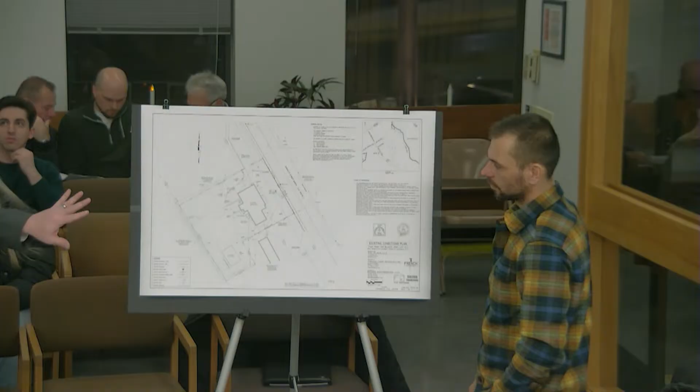All right, any questions from anybody? Do we have a map of what they're doing? Do you have a map? We do. Mario, would you please? I was gonna ask you about that, so we can put that on the screen too, for all those at home that are waiting to see this. So maybe you can show us the difference. Sure. This is the existing conditions plan. This is what you saw initially. You see the conditions of the site right now. You see where it's located. It's stamped appropriately, et cetera.

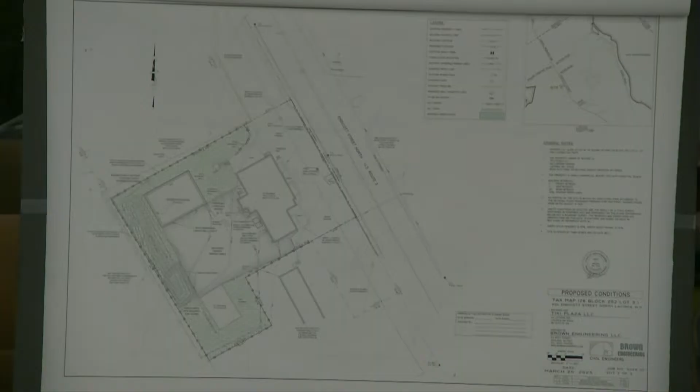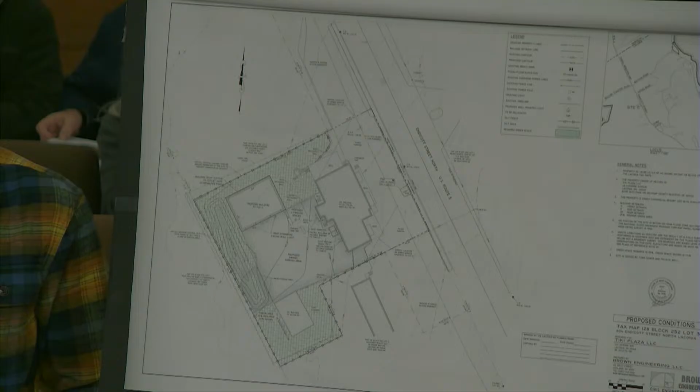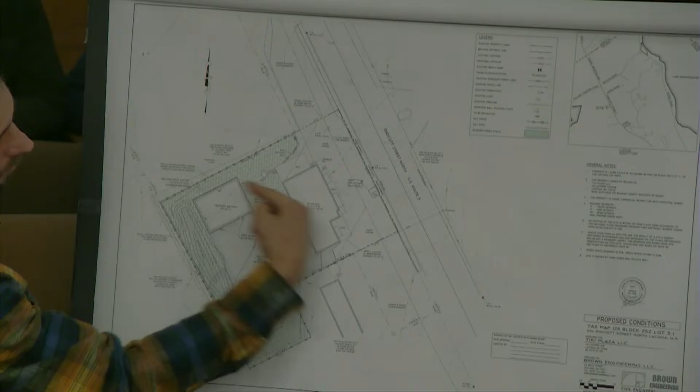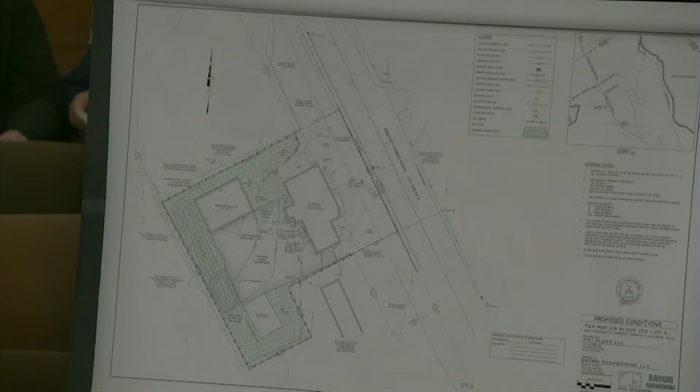And if the pond was to overflow for whatever reason, catastrophe or something like that, where's that water go from the pond? So ultimately, it would be challenging for that pond to overflow. But, sure, describe this, that would be great. I think first, this is what we went over in the first meeting, but it's important to know what the water is doing before any of this happens. The site is sloping down in this direction from the roadway, all the way from Fun Spot. It comes out, comes across, there's a long building here, hits the front of the building, comes around this building, and it all flows down to this lot down here, which is map 128, block 252, lot 1. The stormwater pond does not route this water to anywhere it wasn't going before. Its only duty is to prevent any higher flows or volumes from going downstream. So if it were to overflow, it would flow where it is flowing today.

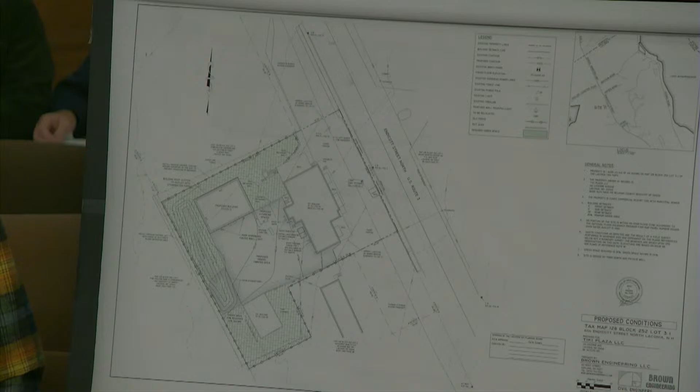So the pond doesn't have high sides or anything, it's level with the ground, correct? Yeah, it's dug down. So it's not like a dam or something like that. No, see the profile of it, and you can see the existing ground line is here. Again, this is all going downhill, but this cut line is in the middle of the pond. So nearly the entire pond is in a cut condition. So there's really no buildup. It's more of a depression.

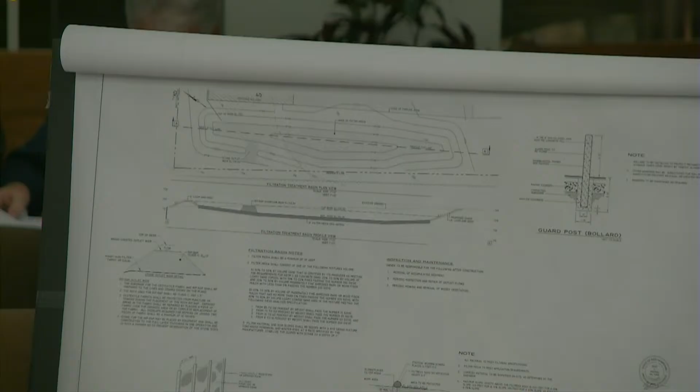Mike? I remember we approved this building, the campground, right, and the abutters sued because they weren't happy with it. The building's not that big to make that much watershed. What's the square footage of that building? 2,700 square feet. But that's not what we're discussing now. We're discussing the amendments and to see if we approve of those, because everything else has already been discussed. Correct. Okay. The only difference is the pond is bigger, the rain gutters are putting everything into the pond, and the additional green space will hopefully soak up more of this water. Correct.

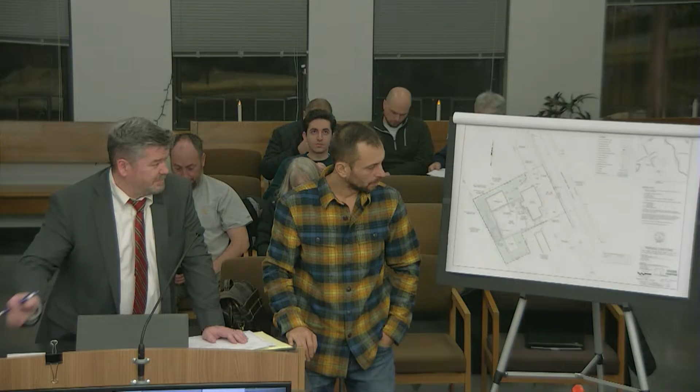Chair, when was the original approval? When was it? Back in December, I believe. No, no, May 3rd, 2023. Okay, years ago. Right, May 3rd, 2023. I thought it was further back than that, before my time. I don't remember talking about this before. Well, litigation takes some time. We worked through it back in December, not a month ago, a year ago. Okay, that's when I remember. I was looking through the minutes and didn't see anything last month.

Any other questions? I have one. So the pond itself, does it have an exit? Yes. Where is that? So one of the changes that came out... Can you speak into the mic, please? I'm sorry. The outlet to the pond has changed from the settlement agreement as well. The outlet previously was under-drained with a 4-inch perforated pipe under the soil, and then outletted as point discharge near the same place, over in this corner. We were asked to move that outlet as far to the south as we could, which we did. It's not very far. We can't make water flow uphill, so we moved it as far as we could.

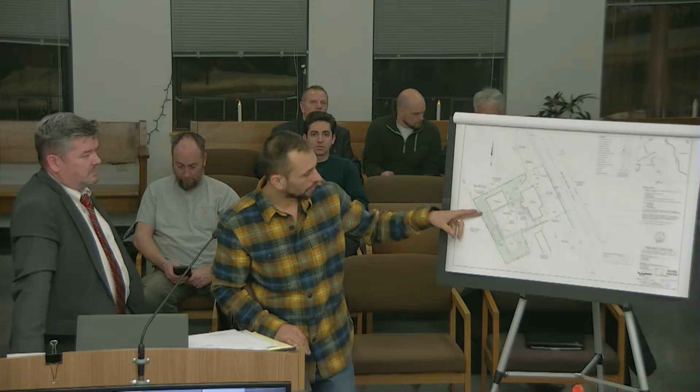And we changed the outlet style from a pipe, a point discharge, to a weir. That gave us two things. It allowed us to turn the water to sheet flow instead of a point discharge, which does not create as much erosion. Not that there's a lot of water coming out anyway. But also, it allowed us to set the outlet at a higher elevation, which allowed us to shift it down. So that came out of that agreement.

Another thing that came out of the agreement is that test pit. I think we were asked to dig down 5 feet and look for seasonal high water table. We went down 7 or 8 feet, and we didn't see the seasonal high. So we suspected this was going to be in a fill area, just the way the land was flattened here and then got steep on the back end, and that test pit confirmed those assumptions. That also allowed us to make this pond deeper.

So we've made it deeper, and mind you, when we submitted originally, it met pre versus post conditions, it passed muster. But now we've made it deeper, and originally it was 3,600 cubic feet in storage, and now we're 6,100 feet in storage. So we've nearly doubled the size. It's way oversized, but it's there, and it's per the agreement. Go ahead, Gary.

Could you refresh my memory? Repeat what you said about the discharge, rather than a pipe discharge, what is it? It's a weir. I know what a weir is, but it's not like a grassy swale or anything? It's a riprap weir. So if you were to look at the back edge of the pond, it would look level, and then dip down for, I think, 8 feet, and then come back up. And it only dips down 6 to 8 inches. This is going to capture most of the water, and it's not going to let a lot of water out.

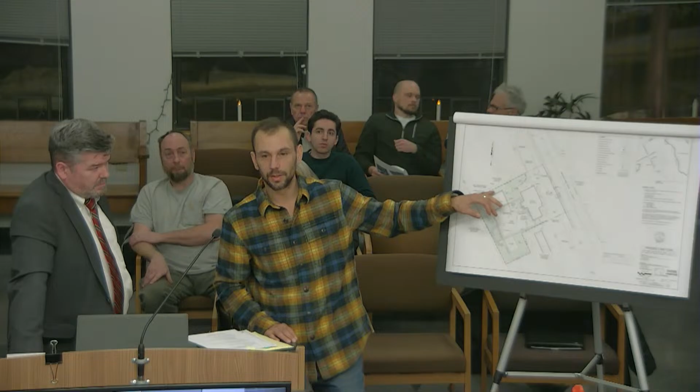Anybody else? Yeah, I had a question. Jake? Jake, pull your mic. Sorry, the flow rates that you posted for 2023, are these numbers from 2023 or from when you made alterations to the pond? Good question. We ran it twice. We submitted it originally without the resizing, without the building being routed into the pond. That's what was approved. We then went out, did the test pits, and as Ethan was saying, we then resubmitted new calculations.

So these are the newest ones that appear in the stormwater report? I imagine so. I haven't looked at which one you have on record, but it's been submitted. Yeah, we submitted the updated calculations that Mario had sent us previously. Thank you. It's January 13th, 2025, revised. We can take a look at that. Look at the size, 6,000. Yes, this is revised. Thank you. It notes on the revised plan that it was revised January 13, 2025.

Anybody else? Okay, thank you. Thank you, Mr. Chair, members of the board.

Okay, we'll open this up to a public hearing now at 6:51. Anybody in the audience like to address this application?

If I may, members of the board, Michael Tierney of Wadleigh, Starr and Peters. I'm the attorney for Pine Hollow Campground, which is an abutter to the property. I've submitted in writing two different letters that I see were in your packet, so I'm presuming all the members of the board have a copy of those letters from December 9th, as well as December 31st.

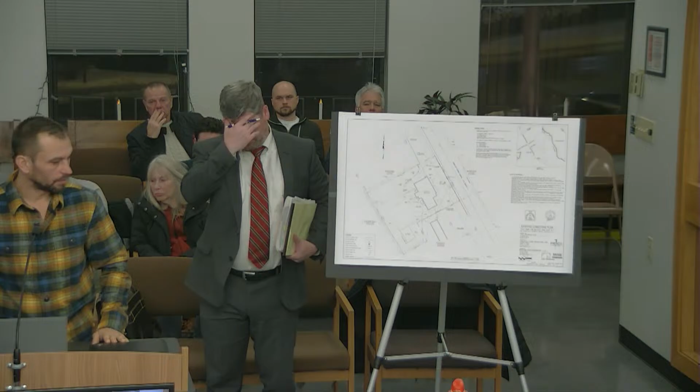So there were a couple of comments that the other engineer had made. One was that we under-showed, or over-evaluated, the amount of impervious surface on the existing conditions. What he's saying, just for clarity, and I know the drainage is contentious, is that on my pre-analysis in HydroCAD, I showed this whole area being gravel. His comment is that the existing conditions don't show that.

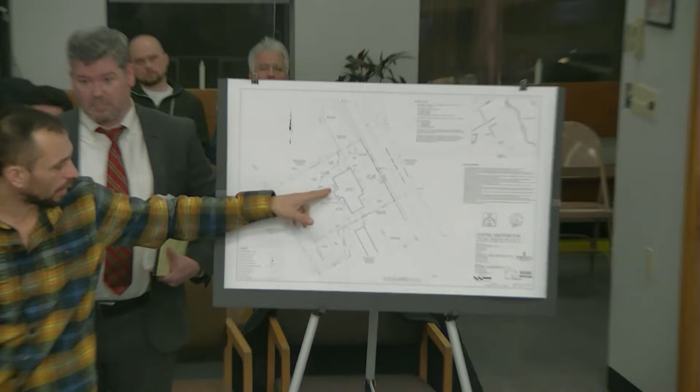Well, a surveyor did not look at this land like an engineer does. He went out there and said there's clean gravel here, some weedy areas here, and some clean gravel there, and he shot shots. When he drafted it up, it's gravel area, gravel area. When I went out there to look at it, it is compacted. People are parking on it, since this is a loading dock, and they drive from this gravel to that gravel. It is acting like impervious surface.

I modeled it as I saw it, the most accurate way I can. I did not make any revisions to the existing conditions plan. I did not see it to be necessary. I thought the pre-condition and post-condition were clear and fundamentally correct, and their engineer did not disagree with that.

The other comment from the engineer was that I missed a portion of pavement coming off the roadway, which isn't shown here but would be somewhere over here. He's right about that. It's about a couple of parking spaces worth of pavement. But it was missed in both the pre-condition and the post-condition, so the effect is null. It's the same amount of water measured coming in before we do anything as measured afterwards. So he's looking for technicalities, and that's what he found, but he did not disagree with the fact that this will not increase flow onto the property.

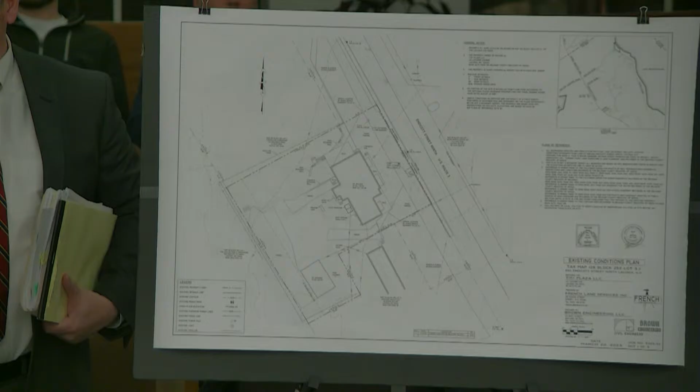The last thing is to respond to the abutter's comment stating that zero water will come out of this pond. The stormwater design goal is not to stop all water from leaving the site. That would starve wetlands and have adverse effects. What we want is the same amount of flow, or just less, of what's happening before work was done compared to after work was done. So there's really no difference with a new building being there.

And we have achieved that. We achieved it on the first submission that was approved, and we achieved it again with the resubmission after we made the adjustments per the settlement agreement. So I think those are the only outstanding questions they had brought up about the drainage. I think they're technical and nitpicky, but fundamentally correct.

Okay, thank you. Ethan, are you going to say something, or do you have any questions for Mario first, with regard to what he just said? No questions, comments, but no questions.

I'm happy to hear comments.

I think it's important to remember how we got where we are. You approved a plan. That plan was appealed to the Superior Court. The Superior Court made decisions, and then the abutter appealed it to the Supreme Court. They appealed the entire decision by the Superior Court.

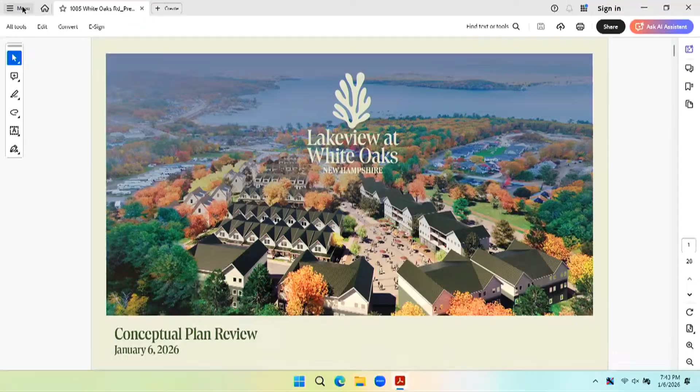Good evening, everybody. I'm going to talk a little bit through the conceptual plan for Lakeview at White Oaks, the old Surfcoaster site.

Just for context, this is very similar to the Laconia Village, Laconia Commons kind of entitlement process. This is the first step for us, so we've been working really hard with the landowner, the civil engineer, and their legal counsel to work through a vision for the site. I'm here to talk through a little bit of that preliminary vision with you all tonight, get some feedback from you all in that process, and then actually go through the performance-based zoning process, very similar to the state school property as well. So this is our first opportunity to show you kind of what we're thinking there.

In the packet you should have received both a copy of the master plan, the physical document that has all of that in writing. I don't expect you all to memorize that word for word, but I also have slides today that I can walk you through the high-level portions of that. Would welcome questions both at the end and during the slides as well.

So I talked a little bit about the team, so I'm going to skip right past that, just to kind of set the table a little bit for you all and the vision. I know I'm preaching to the choir in terms of the site, where it is, and the opportunity, but just to actually build the foundation here, it's a really remarkable opportunity and really remarkable location regionally to be very, very close to not only downtown Laconia, but downtown Meredith. You obviously are right at Meredith Bay as well within the region.

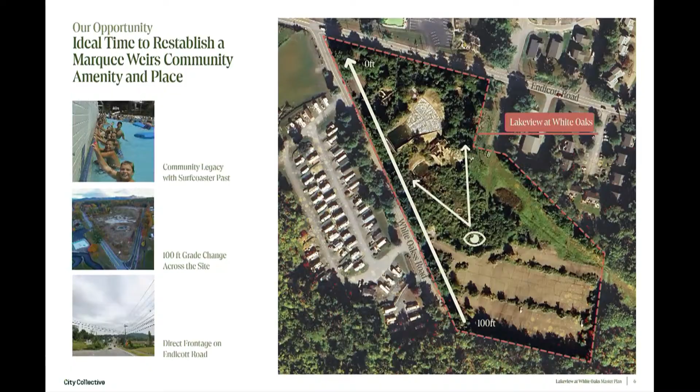And the vision for us, for the landowner and the community, is really this Lakeview living with White Oaks roots, this combination of incredible views, but also this lush, more recreational White Oaks, open space kind of living that comes so naturally with a New Hampshire lifestyle.

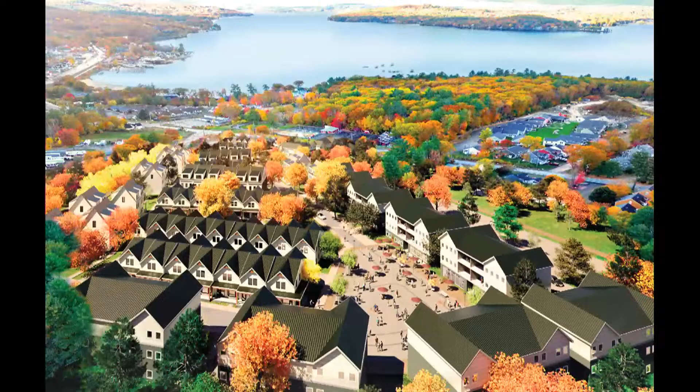So this is just a little bit of an overview of what this could potentially look like. You're floating above in bird's eye on the southern edge of the site, looking north. You'll see beyond there's the community park in the distance, and then Meredith Bay there in the distance as well.

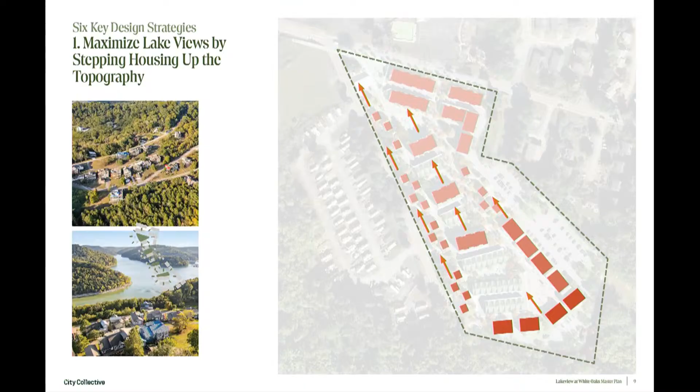So how we got there in terms of the design approach, we did this in 6 key design strategies. The first is that we maximize lake views by stepping the housing up the topography. And so we did a very detailed analysis about where the grades are today, where they actually move up from one point to another, and then we selectively moved housing both up and down and left and right so that the majority of housing, everything you see there outlined in that reddish color, every single unit has a view to the water. And we selectively move those items to allow all of those units to maximize those views.

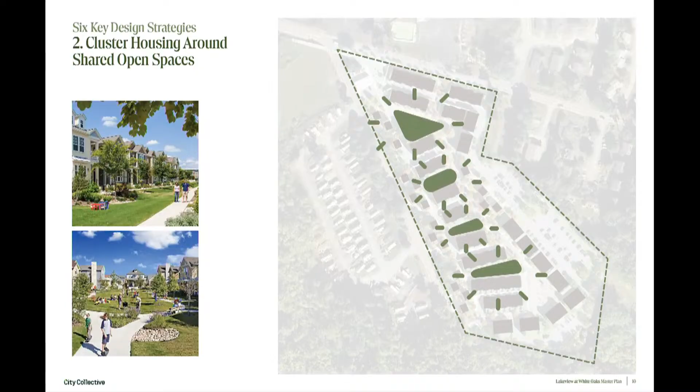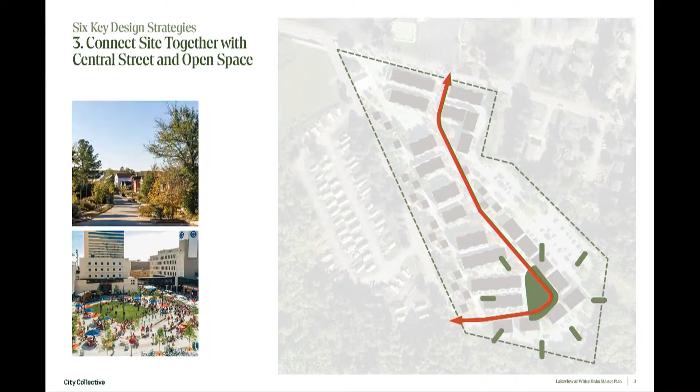The second is that we clustered housing around shared open space. So having a variety around the site in which people can come together, use that open space in a communal way, and have it as a common amenity. The third is to connect the site together around this central street, this primary open space network towards the southeast. Fourth is to infill open space frontages and street frontages with additional housing.

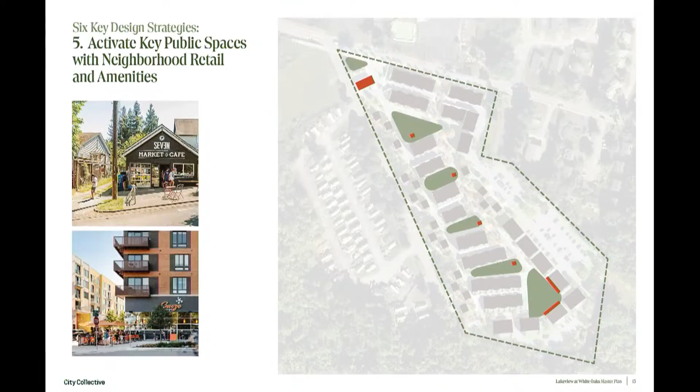Fifth is to activate the key public space with neighborhood retail and amenities. So this is going to be neighborhood serving, convenience, smaller coffee shops, things that are going to be neighborhood serving in nature. And then sixth is to tie the site together with a recreational trail, and then thinking through a larger regional aspiration of connecting that together beyond the site.

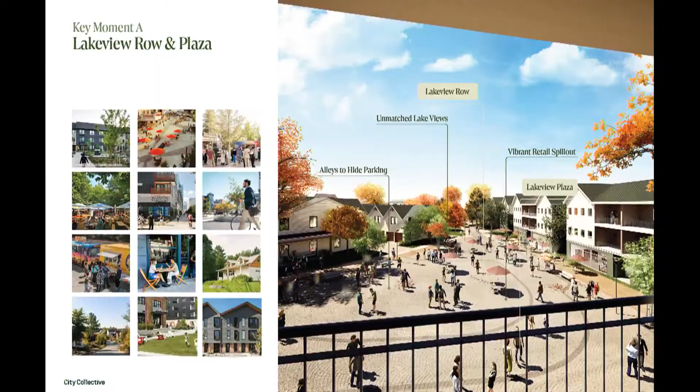This is a view standing at the top of that plaza, standing on one of the balconies from the residential units, looking across that primary plaza space where the Lakeview Row comes down and moves north on the site.

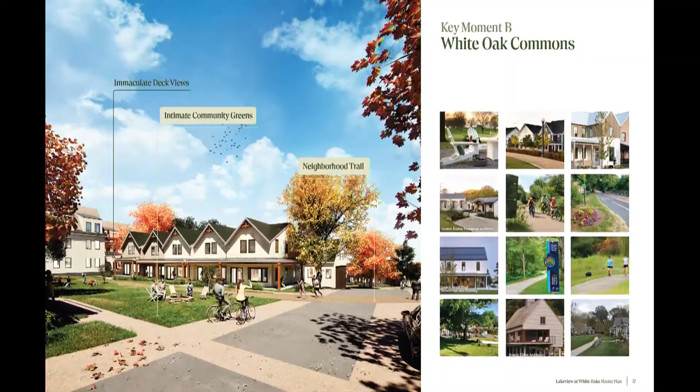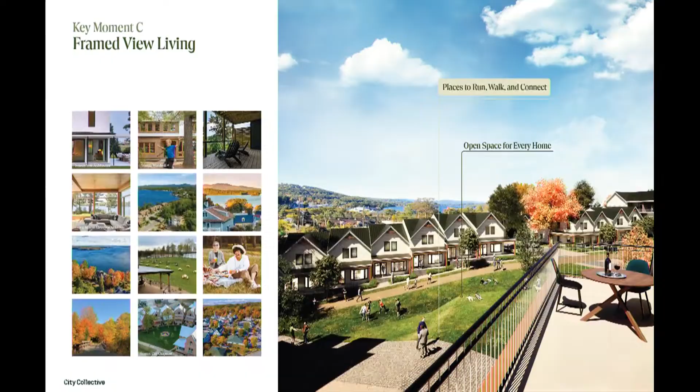There's a couple of key framework plans that I mentioned earlier, but I just want to call out to describe this further. The first is that every single unit either has a direct view of the water or has direct access to an open space, or both.

So every single unit across the site either gets the opportunity to say, wow, I can see the lake, that's beautiful, right out of my living room, right out of my bedroom. Or I can walk right out of my front door out onto a community open space. Or there's some units that get both. And we worked really, really hard to offer that opportunity for all of the residents and visitors across the site.

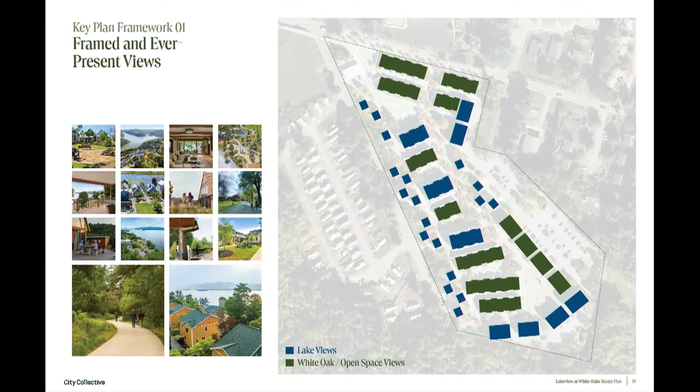And the thinking is, you know, this is an extension of someone that wants to be able to walk or bike to the community park across the street or be able to go to Weir's Beach or use the other amenities around the neighborhood.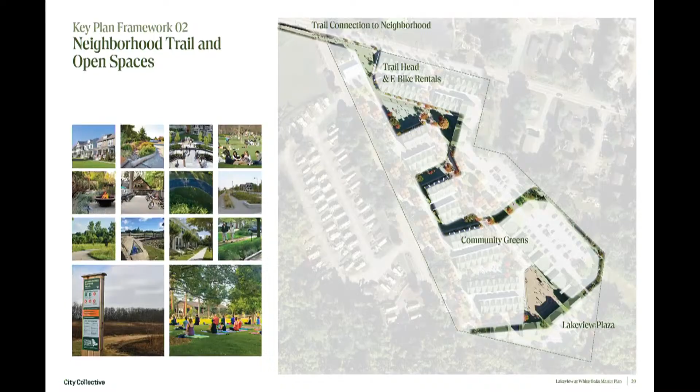That's Lakeview Row. The second is a neighborhood serving alley, so we worked really hard to have the backside of units be serviced by alley facing access for vehicles. And so someone can drive right into their unit, use it as a garage, go into their unit, and then pop back out. But the front of their homes is the opposite side of the garage. So the streets that you're seeing are all pedestrian doors and access. They're not garage doors. Those are all on the back side of buildings for alley access.

And the third component is parking and drive aisle parking. So we've stashed surface parking areas in parts of the site that wouldn't naturally have views. So there's a section of the site, say, on the eastern portion and the most southern portion behind the 3-story buildings that wouldn't naturally have a view. And so we've actually stashed the majority of surface parking in those areas to take advantage of both views and overall access.

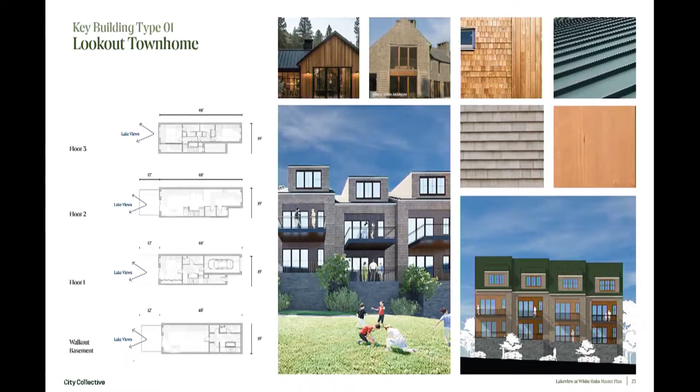The first is the Lookout Townhome. So this is three and a half stories. This gets tucked into the side of the topography, so you're actually entering the garage from an upper story because of how the topography works, and you have direct access on the lower story. It's set up like a townhome, and so these are attached, and you'll see them at the steepest portions of the site. The second is the Vista single-family home.

So these are single-family homes that are smaller, shorter. They come up against White Oaks Road to offer a lower scale for White Oaks, and so these are only 2 to 2.5 stories tall. So how tall, 35 feet? Yeah. Thank you. And it really depends on topography, because topography is such an animal on this site.

And really the primary benefit of the Vista single-family home is its access is coming from the side of it, and then it gets a view to the left, because you're gonna enter either off of Lakeview Row, or you're gonna enter off of Endicott, but the view is perpendicular to the access. So it's a little bit of an odd condition, but we helped create a building type that takes advantage of both of those.

The third building type is the Hampshire cottage. So these are the lower scale. These are 1.5 stories tall. These are often on the northern edge of open spaces for 2 reasons. One, it's a smaller building type. The second is that it's lower in scale to allow the other buildings that are higher on the hill to look over the building, to allow for those to have actual views across the site into the water.

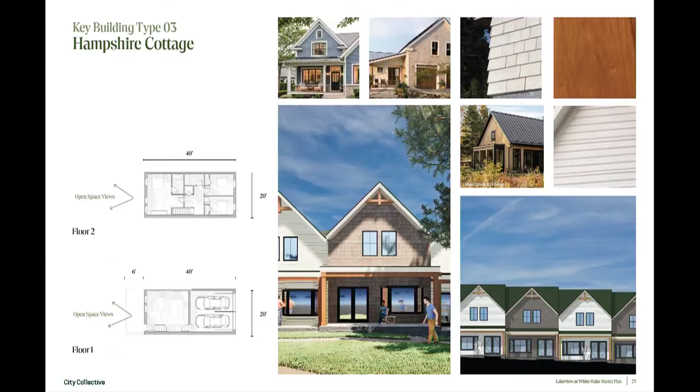And the fourth is the terrace house, and this is the one that is primarily on Lakeview Row, up on the southern edge of the site. These are slightly taller. These are at 3 stories, and that is because they're on the tallest portion of the site with nothing behind it. So it has no one else's view to block. And so that's why it's on the kind of tallest portion of the site.

It's up to 3 stories, and that's where we occasionally want to put the neighborhood serving retail as well. So that's where you have a coffee shop, ice cream shop, kind of neighborhood serving functions that will live in the ground floor of that and help activate that street.

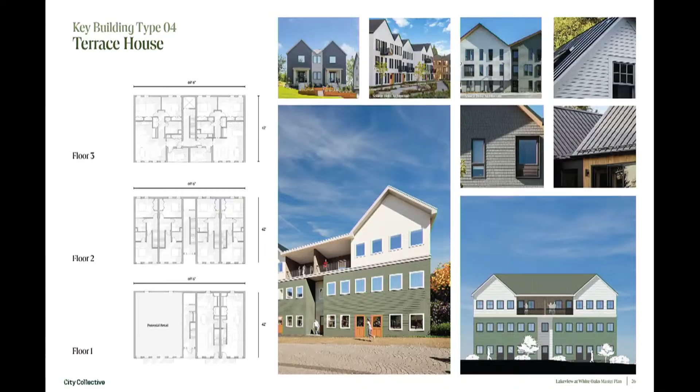What's your estimate of the, when everything is done, the population? Just a guess. It's funny. Yeah, I think you asked me that exact same question on Laconia Village. Laconia what? The Laconia Commons. Thank you. Excuse me. Thank you very much. And it's hard to exactly guesstimate.

Yeah, I mean, the thinking about the retail is that when I say neighborhood serving, I truly mean for the residents here and the immediate surrounding community that's really within a walking distance. So although there might be a little bit of parking associated with those amenities, we actually think it would be relatively small in comparison to the amount of street parking that we're offering in exchange for that. And so you'll see on Lakeview Row, it actually has a fair amount of street parking there. So we have 32 spaces across the site.

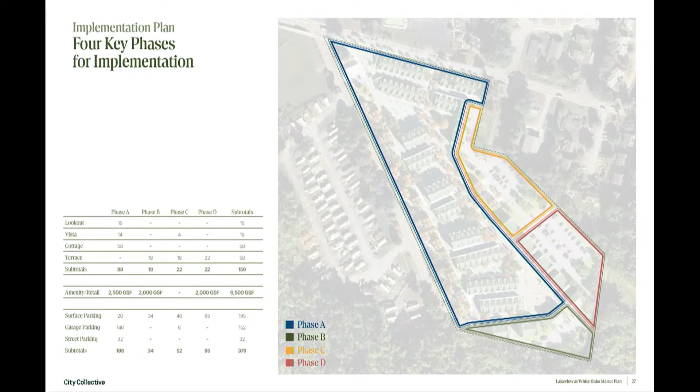Okay, so another question is the egress. You mentioned something on Endicott Street, 11C, whatever it is. Want to show me that again? Sure. No, but he mentioned something about Endicott Street. So is that an egress for vehicles? Yeah, so the current thinking is, without the benefit of having a full TRC process yet, that would become a full movement intersection. And so cars are gonna come right in, right out, left in, left out.

Well, you're going to have a means of egress on White Oaks Road, obviously. Yeah, so the primary thinking is the street kind of connects from Endicott, moves up the course of the site, and then connects over to White Oaks here. Those are the two full movement intersections that would essentially bring the majority of traffic into the site. While you say that, then there might be other means of ingress and egress, other than those two? The Endicott Street one would be a new one, because there's no entry there now.

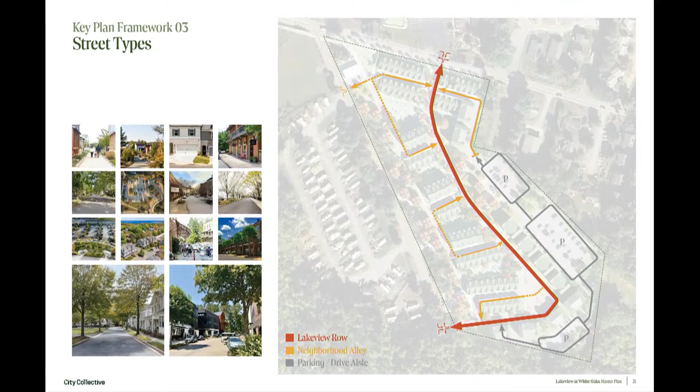That's correct. There's several on White Oaks Road, so there might be some others as well. Yeah, I mean, that's something that we'll have to do in a detailed design process, right, that really works out the traffic. And frankly, we'd want to have a more detailed conversation with you all about what you're thinking about the intersection of White Oaks and Endicott, because we've heard preliminary whispers that you're thinking about doing something there. I don't know what that looks like.

Right now, it's a... Wait. Who's thinking about doing something? The city. The city. On White Oaks Road? And this is why I want to have the conversation, because we don't yet have enough information about what you're thinking there. In Laconia, I heard. So, you know, I've talked to a few people about that White Oaks Road intersection there, and just not having it, I mean, the less intersections you have, the better. I don't care if it's 200 feet apart or whatever.

And I think maybe you ought to look at White Oaks Road, and you've got the property frontage there along Route 11 there. What is it, 11C, I think, right? 11C or D or B? It's B? Okay, 11B. So I was thinking that maybe you would just push your property back a little bit, have a right-hand turn there where you can actually make the turn and merge into traffic.

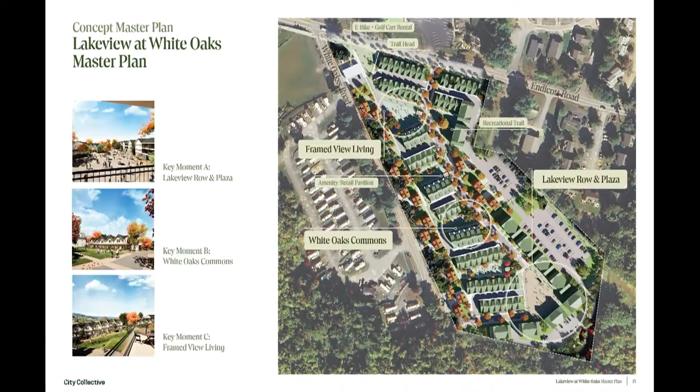With that being said, that's probably not gonna fly. It's too hilly, it's too congested through there. There's a lot going on White Oaks Road besides what you guys want to do. There's some big projects up there that are gonna change that whole area significantly. I agree, fewer is better, and you have a lot of stone wall along that road front too.

Yeah, and make sure that if that stone wall is a boundary stone wall, you can't touch it. That's state law. I don't know why the stone wall is there, if it's retaining or if it's historic, but rules are rules. Stone wall where, Gail? Along White Oaks Road. The whole length of the property? No, there are breaks in it, but there's a lot of stone wall there.

I don't know if that was a boundary issue or not. If it's looking at the boundary, you can't touch it. Well, that's something the state can talk about, they'll deal with you on that.

Okay, any other observations? What's the number of units you're proposing? As currently drawn, it's 150. My math must be wrong, because I tallied up and came up with 174, based on 16 units per townhouse, Vista was 20, and Hampshire Cottage was 58.

You may be looking at a slightly older version. We've actually come up with a new, smaller scale building type in the process. So the version you're looking at, to be clear, shows a terrace house, these red ones here. The version you have, which is old and the previous design before we got here, is a corridor style building that is no longer in the project.

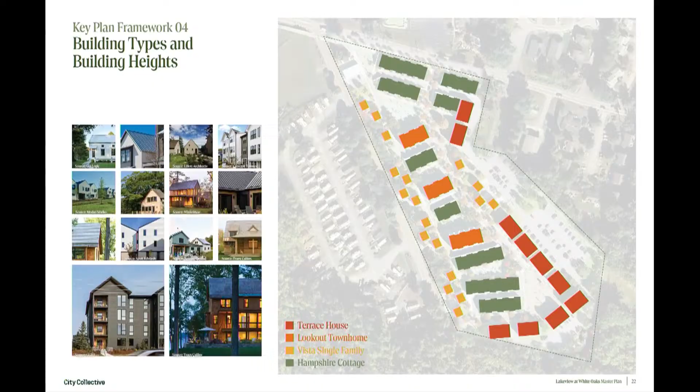You unfortunately got one slightly previous version, sorry about that, we printed out new copies, that was the one that was provided. I was assuming it was the same ones I got yesterday, so I was going off what I picked up yesterday.